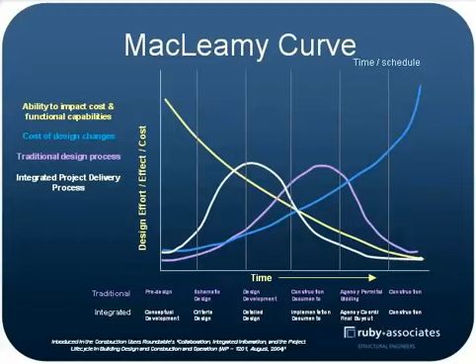The IPD process indicates what they would like you to do is to move that decision up this direction, more into the higher range over here, and therefore have benefit for the project. The whole concept of that is that you have to have collaboration, and how do you generate collaboration?

What I would say to you is, are you shovel ready? Because all of those processes, whether you like them or not, will be where you are. One way or another, sooner or later, you're going to get some of that sand in your shoe. And I'm going to get to where my slide is here because I went a little past where I was flipping. I apologize for that.

And if the question would be, is the game changing? So are there common elements in these three elements here? Is there something that we can say it's okay to make a difference, which box we're in, that we can do things similarly? Well, in design build, there is, and there are elements of collaborative design.

It can be that type of process. It partially integrates the design team, not wholly but partially. It encompasses many of the attributes of lean construction, which we really haven't seen that too much, but in basic concepts of it. But it also engages more of the project participants. But probably better yet, it's really cost and schedule driven.

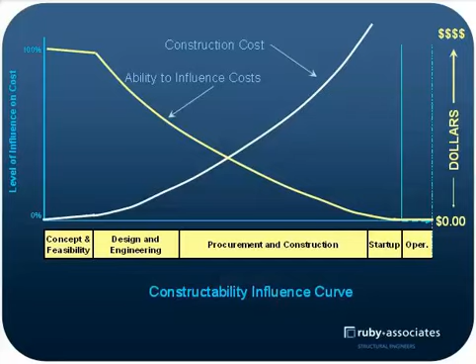Now, I showed you a little bit before, the influence curve. This one's a little more specific, but we're talking about during the concept and feasibility stage. I have almost a 100% chance of providing knowledge to the structure or knowledge to the system, whether it be structural or not, and therefore I can maintain a reasonably good curve of influence if I can do it there. Likewise, the curve goes that direction.

Now, if I go back to the Construction Industry Institute, this was their definition in 1986: the optimum use of construction knowledge and experience in planning, design, procurement, and field operations to achieve overall project success. Now, the only way that you could do that is for there to be construction personnel on the design team - not at 30%, not at 60%, not at 90%, but the whole thing. Now, how do you do that?

Well, I think through relationships, and there's a cost there, but there's also a benefit there. Now, is it possible that the construction professional doing this may not even be the bidder? There are those of us, myself plus others in the industry, that basically spent 20, 25 years in the fabricating business, and we know that - we know costs, we understand those things. So that type of input is one of the ways you can do it without committing to a fabricator.

But on the other hand, if you have a good fabricator and you can do it, the question would be: can you get better numbers? You can get better numbers from quality contractors. So, I would say, a truly integrated design team would include some sort of construction professional. Now, who he is, how it's done, would be your individual issues - your ways of generating it, people you know, who you have experience with.

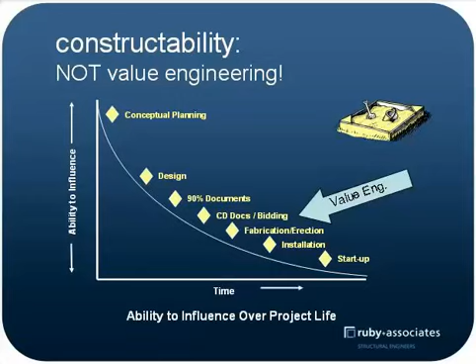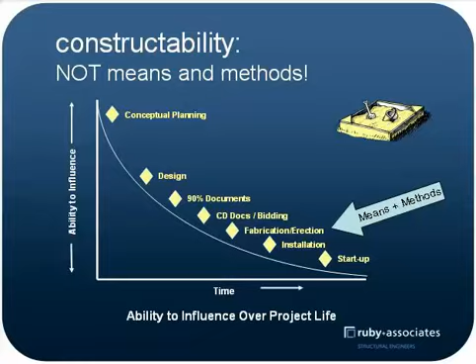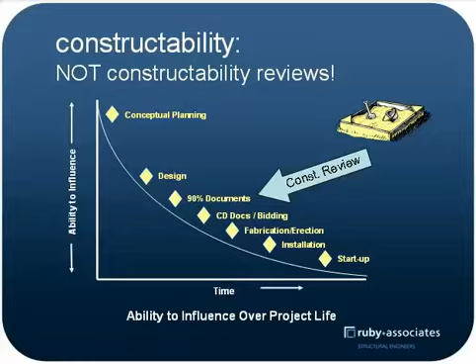Now, what I'm indicating is that if you wait until then, the design is only a critique of what you did. It's not a critique of what you didn't do. If I started back here, then we critique what you didn't do and what you could do better. Constructability then begins at the beginning, and it's a continuous process. It is not an event.

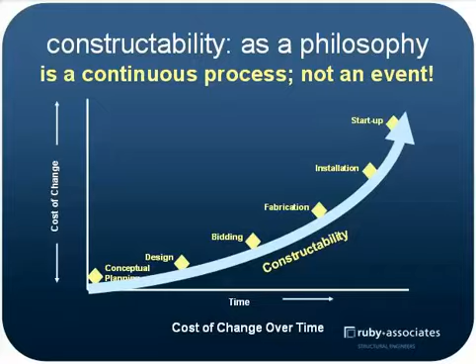So for 2010, the definition gets expanded a little bit, indicating through a collaborative team effort in the planning, design, procurement, field operations, and building operations to achieve the owner's overall facility operation and maintenance objectives. There's a whole new element into that process today, and we're going to be living with it as we move forward.

So what are our primary drivers? As we looked at it, I'm sure cost and schedule is definitely there, but for the designer, it's time and dollars. For the fabricator, it's another element — he's looking at numbers of pieces and complexity of details before he gets to his man-hours.

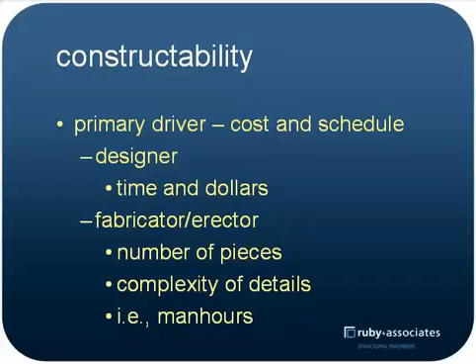So what's in it for you? The question would be, if I'm at the front end with the GC and the CM, contrary to popular opinion, they can increase their profitability because they enhance opportunities they have by doing the process. For a fabricator or erector, it can give you a competitive edge — you can become a value-added provider.

For the design firm, you can reduce RFIs. You'll enhance review and the approval process — it won't take you long. Your construction administration improvements, costs will significantly decrease, and your image of on-time and within-budget projects will go up. That can't be bad.

But let's talk about real numbers — numbers from studying over 100 to 150 projects. A $20,000 investment in constructability yields $100,000 to $400,000 in savings. For a $200,000 investment, $1 to $4 million in savings. And this is records from projects that actually exist.

Oh, okay, I'm sorry. Okay, apologize for that. Okay.

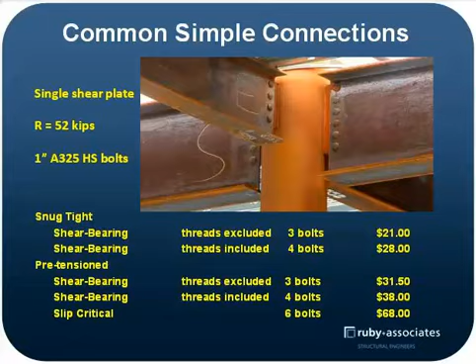We have one project we got involved in. The original project had 44,000 bolts. We modified the design, the connection design issues, and changed it to 21,000 bolts. Does that relate to man hours? Does that relate to schedule? Absolutely.

Some time ago, we had a contractor in the design build business who was tracking some hangars around the country. He sent us a hangar design he had already bid on a project and lost. He sent it to us and said, what can you tell me? What are my options for this building? What else could I have done?

In this particular case, these bays are 30 feet. There are 11 trusses, and there are 786 joists that are about 30 feet long. There are 144 bottom chord braces with 228 connections. And we have 145 struts, the bottom chord struts, and 290 connections.

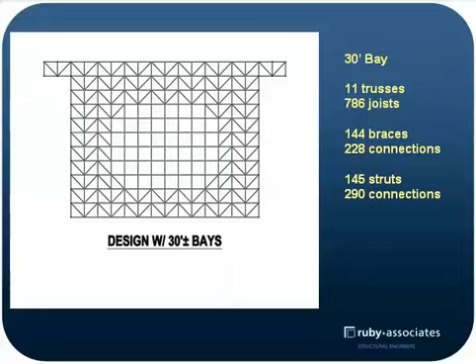If we look at it with a 40-foot bay, the building's not quite the same dimension, but it's very close. We now only have 8 trusses, not 11. We have 576 joists - that's less. We have only 72 braces - that's half. And we have 74 struts, 148 connections.

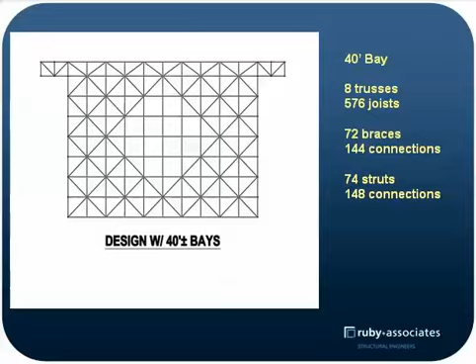Looking the other way, the 30-foot bay has 11 columns, the 40-foot bay has 8. The 30-foot bay has 40 diagonals, the other has 30. One has 50 drag struts, the other has 35 - that's a typo, I apologize, just noticed it. The other has 111 joints in this bracing system, and the other has 79.

Understand that once you put the siding on this building, you can't tell the difference. You can open the doors or close the doors, do what you want, let the snow blow, let the wind blow - it doesn't look different.

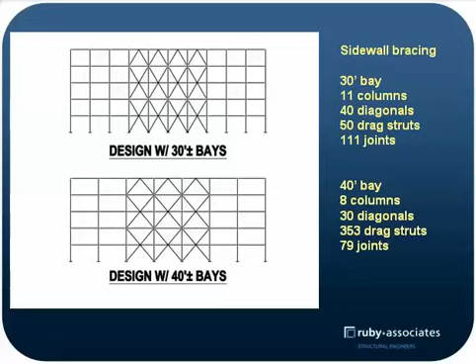Trusses: 30-foot trusses, there's 11 of them with 14 panels and 55 shipping pieces. On the other bay, there's 8 trusses, 10 panels, 40 shipping pieces. Tonnage, you could throw a blanket over the difference in the tonnage. So where's the cost?

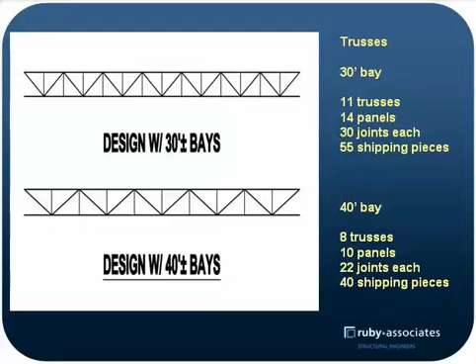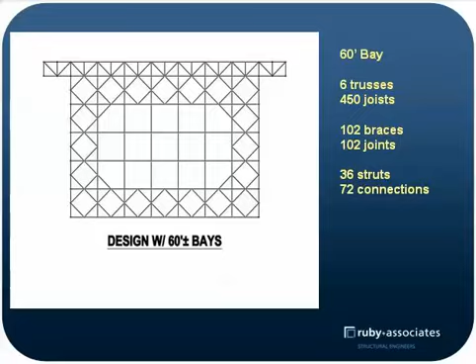So we did an extra one. What if I did a 60-foot bay? I only have 6 trusses. I got 450 joists, 102 braces, 36 struts. So when I look at the 30, the 40, and the 60, understand I can put the siding all over those buildings and you can't tell the difference. They're the same - there isn't anything wrong with the structure of any of them.

But if you look at the diagonals and the pieces - because the fabricator, although everyone uses dollars per ton, that's really not a metric for a fabricator. They buy steel by the ton, that's the only thing they buy by the ton. Everything else, they take that cost and add man hours for painting, shipping, handling, cleaning, drilling, welding, bolting. Just man hours, man hours, man hours. We're here looking at pieces, pieces, pieces.

That's a cost, a major function. This is a constructability issue with regard to it. There's nothing wrong with the design - the design will work in either one. The question is, if I have this knowledge and understanding to ask the right questions, I can move to the next area.

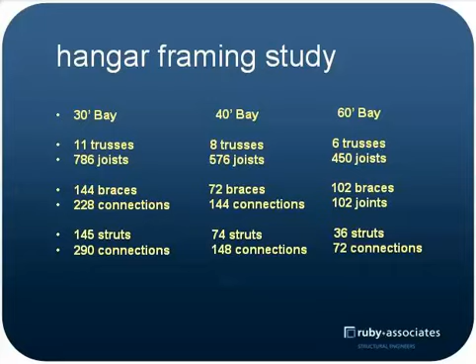Maybe in the past, before you came in here today, constructability meant simple connections and simple construction - bolted versus welded, minimum temporary bracing, no shoring required, no special procedures required. You went through 30% and 60%, and 90% documents, reviewed them, made your comments, made the guy feel warm and fuzzy. You're maybe even involved with some trade-specific design assist services.

Now, how do you want to sit down and tell the engineer that you don't really think his design is what it needs to be? So what you're really only going to tell him is something kind of soothing, because he is going to be approving your shop drawings. So you can't possibly get to that point. It doesn't work.

It may be some of all of that up above, but we believe constructability is a design philosophy, and it's much broader.

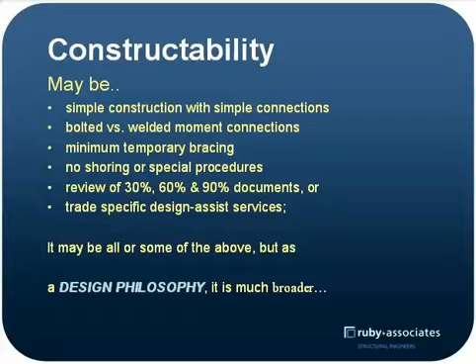A 4-story, 150,000 square foot hospital - what can you do with that? Well, if you meet on a regular basis with the design team, mechanical, electrical included, fire protection, etc., and work out the project, what we have here is a project that was built 2 years prior.

The owner in this particular case had an idea. This idea was 5 years ago. He did IPD, but the only exception is we didn't all have a signed contract. What we did was get together, and the contracts were negotiated based on designs as they were completed. But he believed he had the right contractors - he had been doing this for a while, and he chose contractors he trusted. He said, gentlemen, I want to do this.

Well, designs took 10 weeks, same time, same hospital. He saved just shy of $500,000 and cut 17 weeks off the construction schedule. It amounted to about $3.75 a square foot.

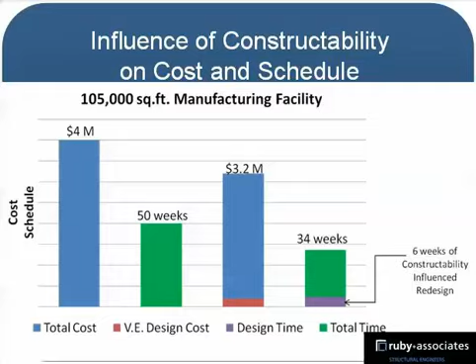The design philosophy we have includes visualization, innovation, imagination, clear, concise project visions, concepts and attributes, clean slate concept. We don't come into the thing with preconceived notions.

Most of you who have ever been involved in any sort of brainstorming sessions know the worst thing you can do is start taking shots at the first idea that's thrown up, because then people say, well, I'm not going to get picked on. Don't do that. In those type of sessions, what we do is bring them up and everything sticks to the board, and then we start evaluating where we can go.

But you need to have collaboration and coordination, designer and constructor communication. That's a new, very radical concept. All designers from all construction trades. And you have to maintain the vision, you can't back off from it as we get down the process. So all of this is really done through coordination and collaboration of the process, making sure the people and the individual is there. Institutional building.

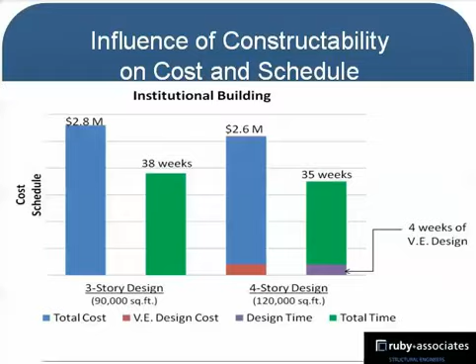Design philosophy is a process, not an event. It's the infusion of construction knowledge and experience in the planning, design, procurement, and installation, with cooperation and collaborative design, including all trades.

A 1.2 million square foot hospital that's presently being completed. We changed the lateral system in this hospital at the request of the general contractor. This did not come from the fabricator. The general contractor noted this has concrete core walls 2 foot thick, plus or minus.

And based on, we're building this in the Detroit area. Concrete work in the Detroit area is not what you want to do. It doesn't mean you can't do it, it just means you probably ought not to.

Schedule-wise, we're talking 13 months for this particular phase of the project. They came back to us and said, what can we do to modify that schedule? We looked at changing the concrete core to steel.

We had some time working with the architect and engineer to get that done, but we did take it over. We did not change the architectural at all. We fit the steel inside the 2 foot wall plus the drywall on the outside of it. But we managed to remove $4.5 million out of the project and reduce the construction time by 3 months.